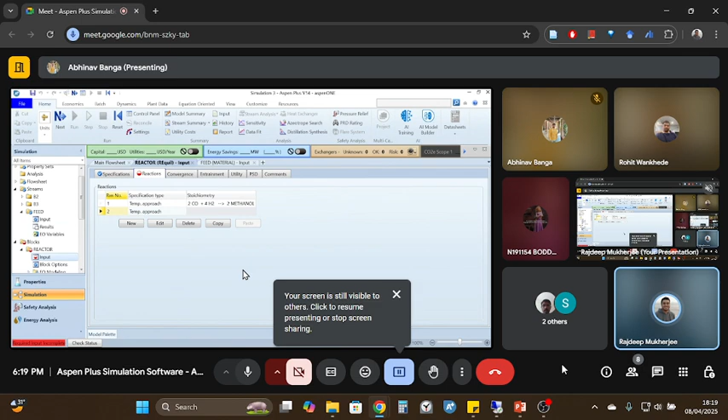Okay sir. So how are you guys solving it? Can you share your screen and show? Rohit or Abhinav, anyone can share your screen and show. 2 seconds. So this is you are defining the reaction, right? Okay. Yes, yes, you're going right. Yes, fine. Third reaction will also be good. Have you taken the screenshot of the problem that I've shared? Yes sir, I've taken the screenshot. Then it's not a problem. Yes, go ahead. Because I'm typing from here, otherwise it's very difficult if you change the screen, sir. Yes, yes. Sir, I have got results. Okay. Okay, then you share your screen and show us how you've done it. Okay, sir.

So did you optimize it yet or have you just simulated? Just simulated. Okay, okay. Show the simulation, the feed specification, and then the reactor specification. This is the reactor specification. 260, 50 bar. Okay. These are the reactions. Okay. Fine. Now start with the sensitivity analysis.

So what is the important compound in this reaction? CO2 and hydrogen. I think it is DME, no? The dimethyl ether. Yes. We have 50% of CO and then 50% of hydrogen. I think this is methane steam reforming. What reaction is this? You have to find out what is the important product that you are getting.

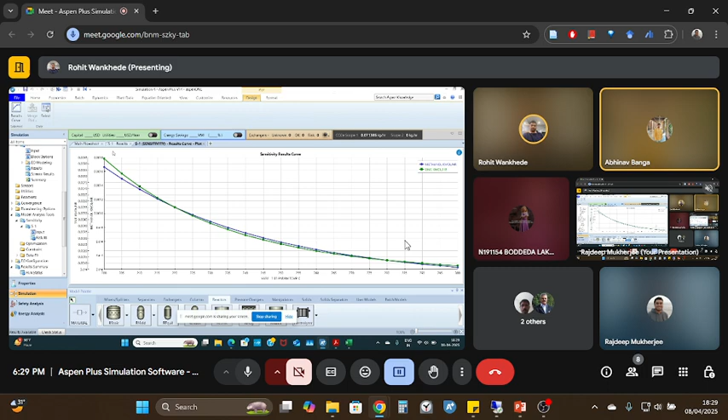As we decrease the temperature, sorry. As we decrease the temperature, the mole fraction is higher if it is below 260 degrees Celsius, right? Yes, sir. You can say that means it's an exothermic reaction. Yes, you can say that also. So now optimize this.

Variable would be temperature, right? Again. Yes. No, here you have to define the objective. This is going to be your difference. So select one product that you want to increase. Let's say DME.

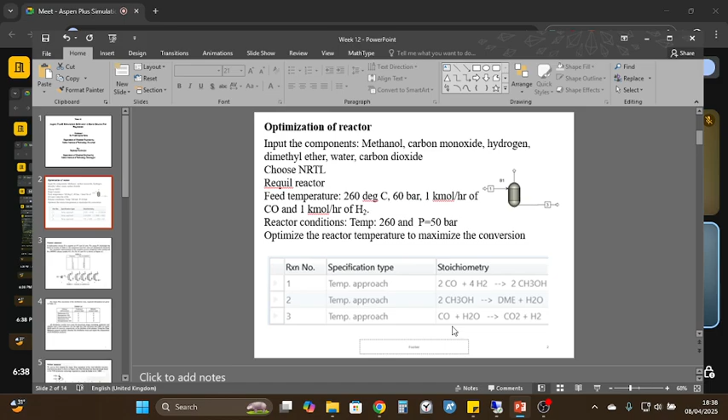So let us do the next problem. These are the types of problems that you are getting in your assignments. Over here, the questions are a bit long with a lot of data. So try to take a screenshot of this problem. It is not that difficult. They are very straightforward questions. It's just that the process flow sheets are a bit complicated.

A hydrocarbon stream H is supplied at 5 degrees Celsius and 2.5 atmosphere. The pump P1 discharges the feed at 10 atmosphere. In table 4.1, the component-wise flow rates are tabulated for stream H. The schematic representation of the complete process integrated with a pump and 5 distillation columns, that is C1, C2, C3, C4 and C5, are shown.

For Aspen Plus simulation of the distillation train, the required information is given. The names of the columns are given, C1, C2, C3, C4 and C5. The condenser pressure and the reboiler pressure are given. All distillation models have 20 theoretical stages, including condenser and reboiler, and a total condenser. For the light key and heavy key, we expect 99.9% and 0.1% recovery respectively in the distillate of all columns.

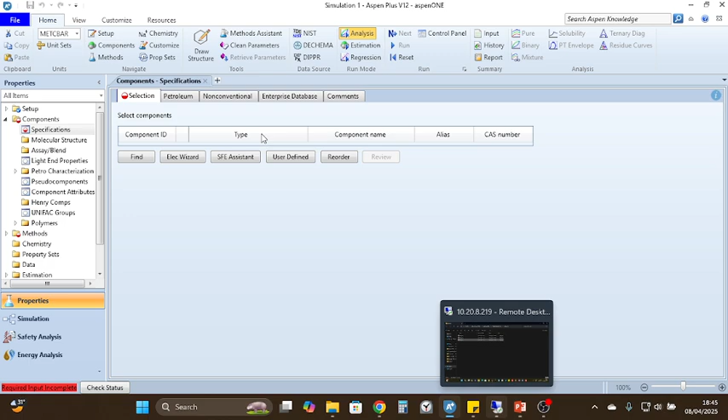C1, C2, C3, IC4, NC4, IC5, NC5, NC6. Then Peng-Robinson property method. The interaction parameters data. So property analysis.

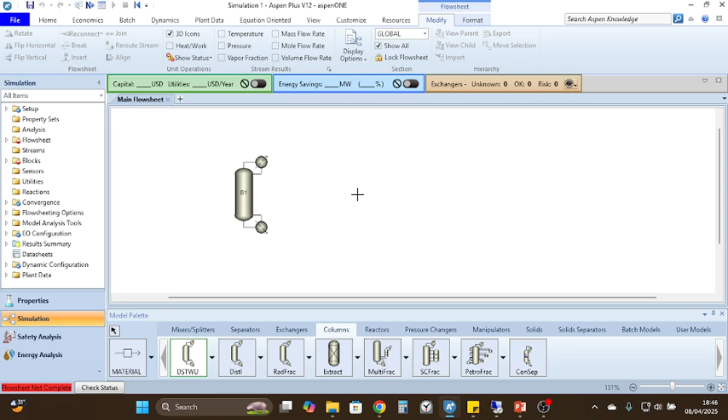So we have 5 distillation columns. 1, 2, 3, 4, and 5. So this is C1, C2, C3, C4, C5. So we have the feed. As discussed, I'm removing the pump from here. So we have the products.

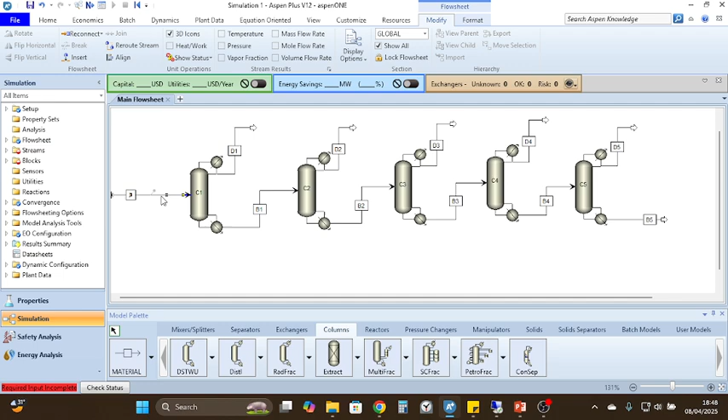This is your feed. This is D1. Specification: 5 degrees Celsius, 10 atmospheric pressure. Next is our mole flow. So C1 is 10, C2 is 35, C3 is 50, IC4 is 130.

NC4 is 200, IC5 is 180, NC5 is 200. I forgot to add another component. The component is C6.

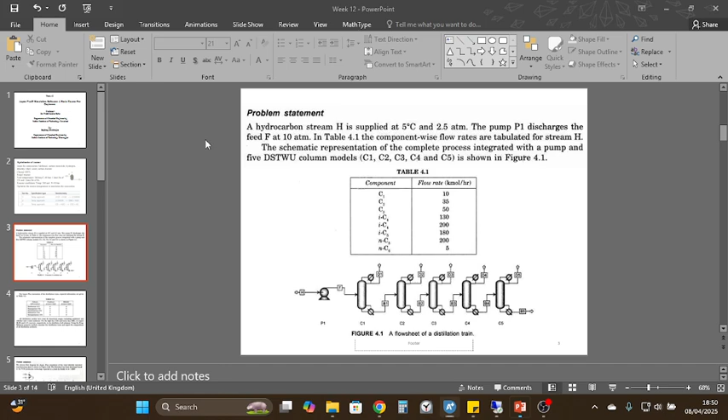C6 is 5. Now for C1, what will be the light key component? C1. And all the theoretical stages are 20. Condenser pressure is 9 and 9 atmosphere. So this is C1, and this is 0.999. Okay. Heavy key? C2, sir. Okay. 0.001.

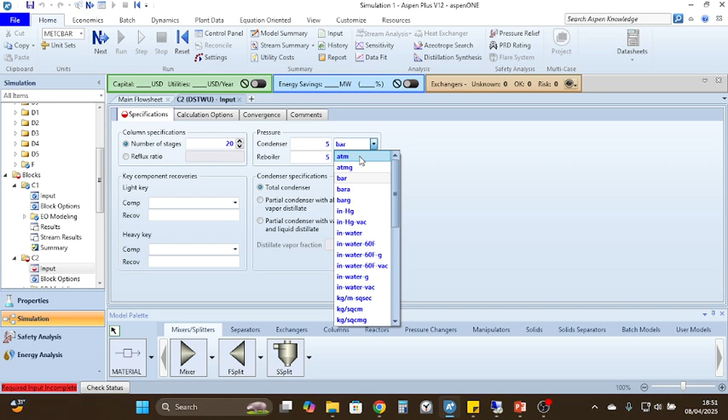Number of stages here also 20. This is 5 and 5 atmosphere. Here, what will be the component? C2. Yes, sir, C2, and light key is C2. Heavy key is C3.

This is our C3. 20. So our light component is C3. Heavy component is, what should be a heavy component? IC4 or NC4? IC4 will be the heavy component, sir. This is 4.

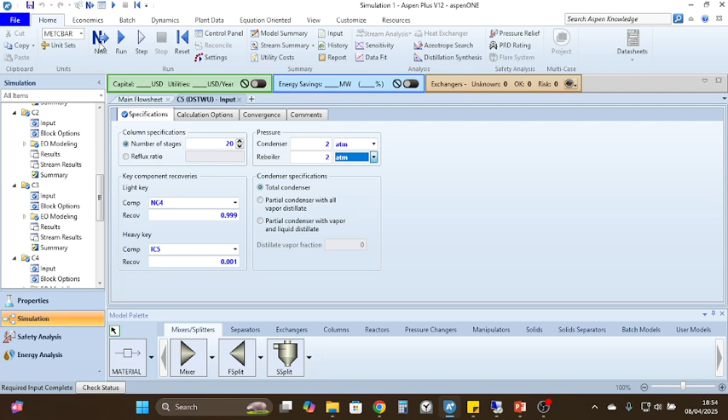So what component will be here? NC4. And the heavy key component will be IC5. So we should add some 2 more columns. Okay. So we look at all the results from here.

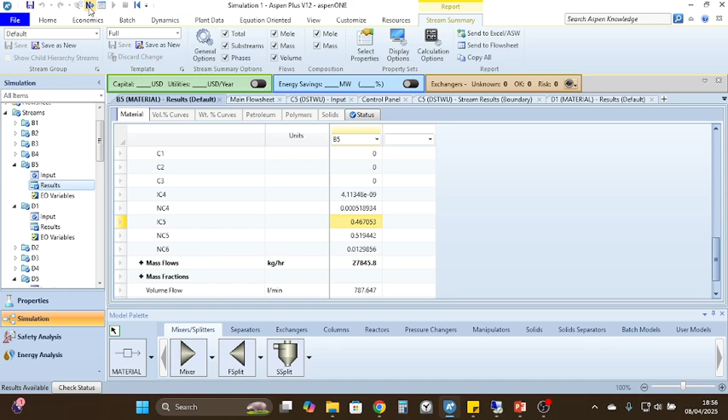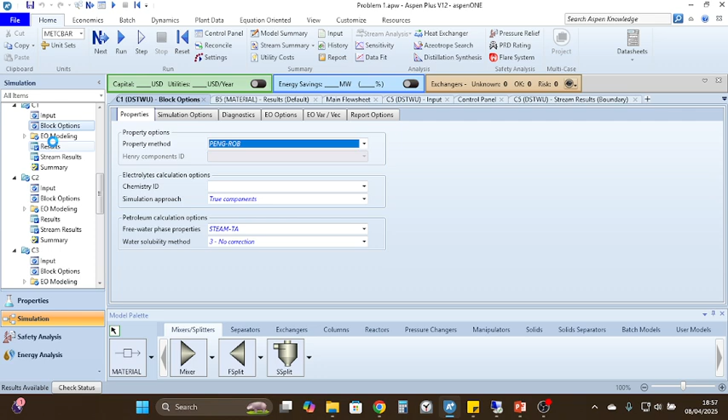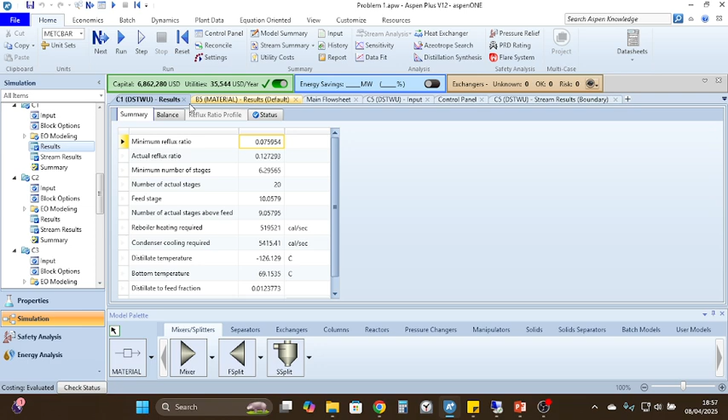There is another way you can do it. If you turn this on now, it will give you the cost of the unit operation that you are handling. So over here you can see it is showing that it is driven by electricity, but you can change this also. Usually it is given over here if you want to add any utility stream or not, but since it is a shortcut distillation method, that option is not being shown.

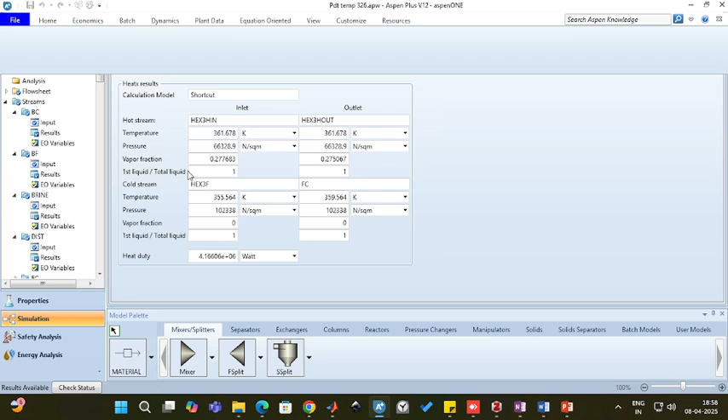So this is actually a downstream process that I have designed for my current problem over here. So, for example, this is a condenser over here. So I need to find out the utility that is required. So over here I have defined the utility. I have defined the electricity and I have defined the water as the cooling utility that will be required. So for this condenser, once I've specified over here, there is a utility option. So I have to select this utility ID as water.

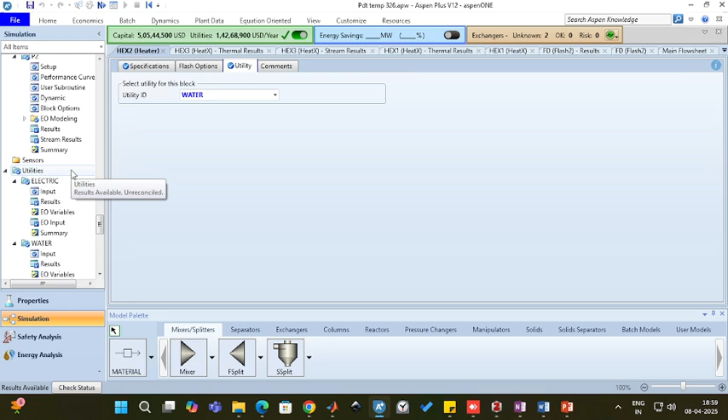So naturally that calculation will happen as to how much water is being required. In this economic analyzer, it is going to estimate the total amount of water which will be required in my process. And to define the utility, it is defined usually over here. So you can give the purchase price of water.

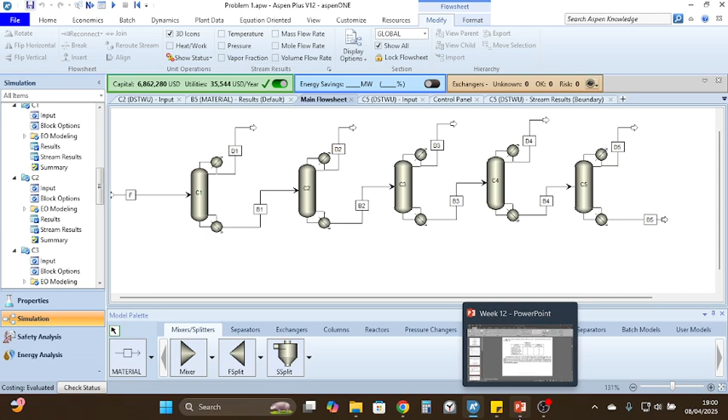Let us go to the next problem. This one is a very big problem, so I'm going to give you 15 minutes time to solve it. And I'm not going to solve this problem. This is not much difficult. There is this compressor, flash, and a stripper. Do you want me to solve the short problems or the long one?

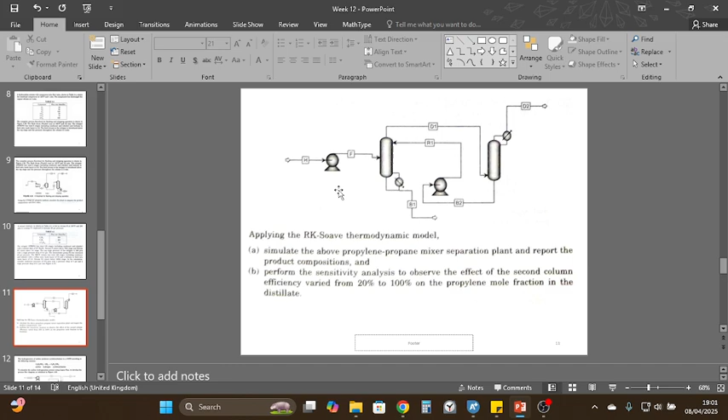Yeah, you solve the difficult problem. If it is short, it's easy, we can do it ourselves. Okay, then I'm going to solve this problem. This problem also I can solve. So two problems will be there which you can practice on your own.

So over here we have the process flow diagram of vinyl chloride monomer manufacturing plant, based on the VCM production technology reported in Seider. So we have a mixer going into a reactor, then another mixer, a heater, a pump, again a heater, then again a reactor, then two heat exchangers, then two distillation columns, and finally a splitter from where a stream is going to purge and the remaining stream is going back and mixing with the outlet of this reactor. So take a screenshot of this process flow diagram first.

So this is the question statement. Take a screenshot of this as well. Pure ethylene stored as a gas at 70 degree Fahrenheit and 1000 psia with a flow rate of 20 tons per hour, and pure chlorine stored as a liquid at 70 degree Fahrenheit and 150 psia with a flow rate of 50 tons per hour enter the mixer block B1 operated at 2 atmosphere.

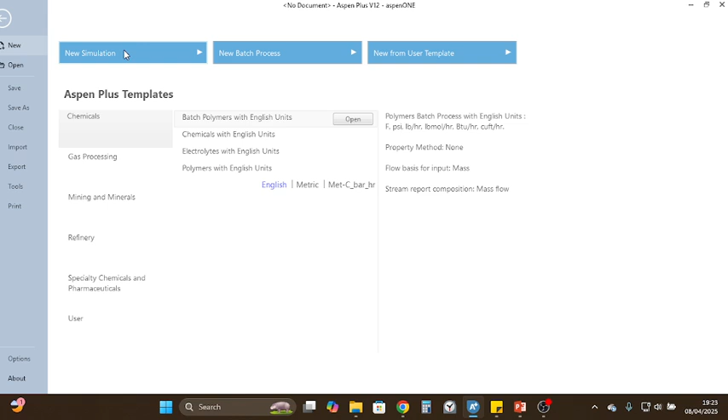Hello, sir. Yes. Sir, if time permits, after that, can you solve assignment 2 part B question? Assignment 2 part B. In that, I have used Peng-Robinson method, but I am not getting the right answer. A different method also I have used. The answers are not matching with the given answer. I think we have discussed this problem, right? You had asked me the same thing about Peng-Robinson method. Did they specify the method name specifically? No, method is not given actually. This is assignment 2. Okay.

So if the method name is not given, then through method assistant, whatever you have chosen, it should be correct. You can mail NPTEL regarding this. That is the group mail that you have. Someone else had asked the same problem. It was the same assignment, sir. I think week 2 assignment only. You two had the same problem. Same assignment week 2. Yes, yes.

Over there also there was some problem: the method name was not specified, so he has done it with method assistant, and then the answer did not match. It will be close, but it won't be within the range that is given in the answer. Is this the same problem that you have faced? Yes, sir. But it is close, right? Not that much closer. Answers are different. If time permits, can you just check after this? Okay.

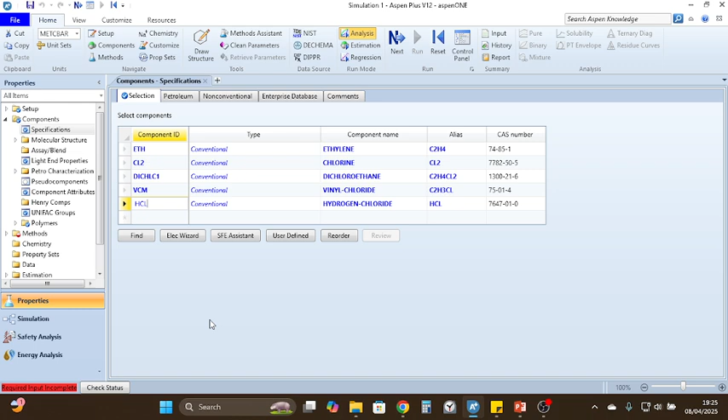So has anyone been able to solve this problem entirely or partially? Just now the block diagram has been made. Okay, take time.

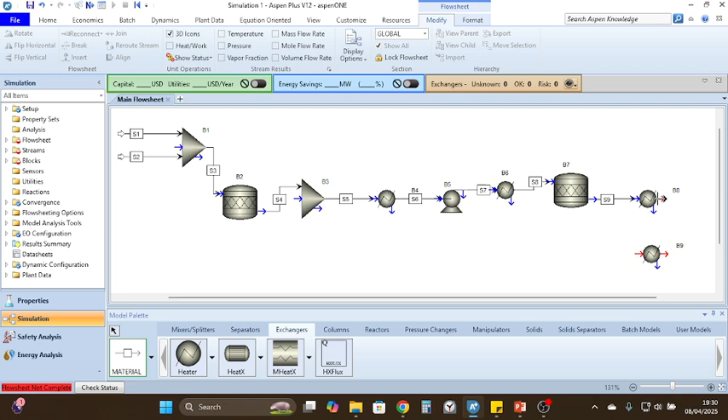What are these columns? These are DSTWU columns. Yes, sir.

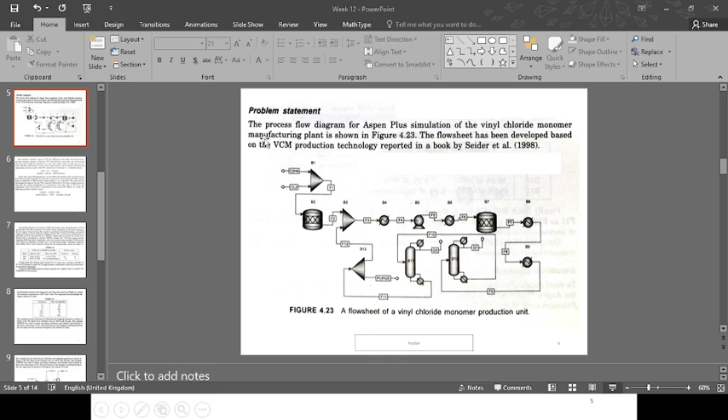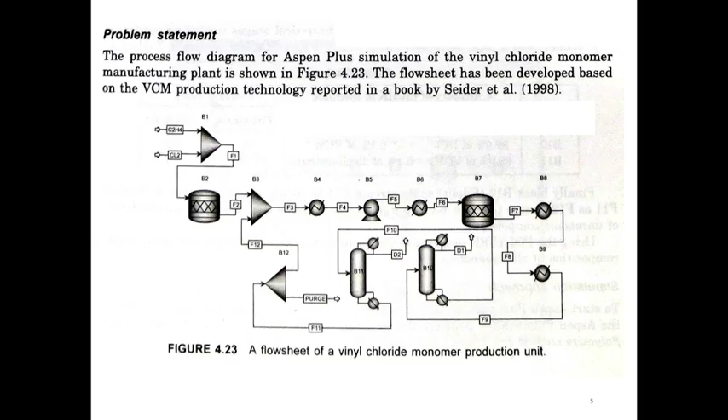With a flow rate of 20 tons per hour. So this is a mass. So we have 20. This is tons per hour. 20 tons per hour.

Next we have chlorine. What is the condition of chlorine? 70 degree Fahrenheit, 150 psi pressure. So 70 Fahrenheit, 150 psi pressure, and the mass flow is 50 tons per hour. So mass flow, this is 50.

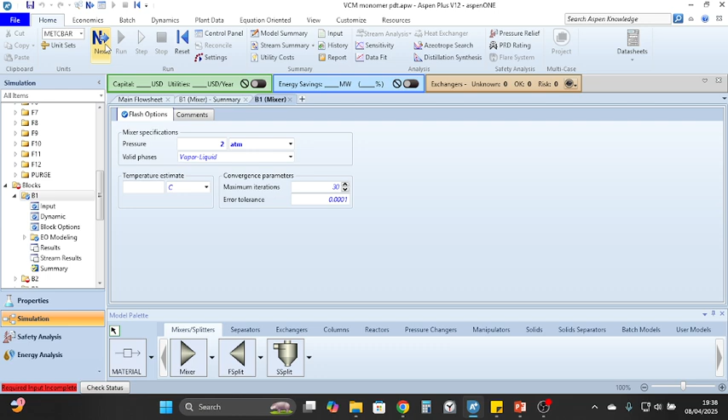Now this is our B1, which then moves to reactor B2, which is run at 363 Kelvin and 1.5 atmosphere pressure. 363 Kelvin, 1.5 atmosphere pressure.

In this stoichiometric reaction, the following chlorination reaction occurs with 98% conversion of ethylene. So this is gas, this is liquid. So the valid phases is going to be vapor liquid.

Next we have to define the reaction. So enter the stoichiometric reaction with ethylene and we have chlorine, and the product is dichloroethane. The fractional conversion is 98%.

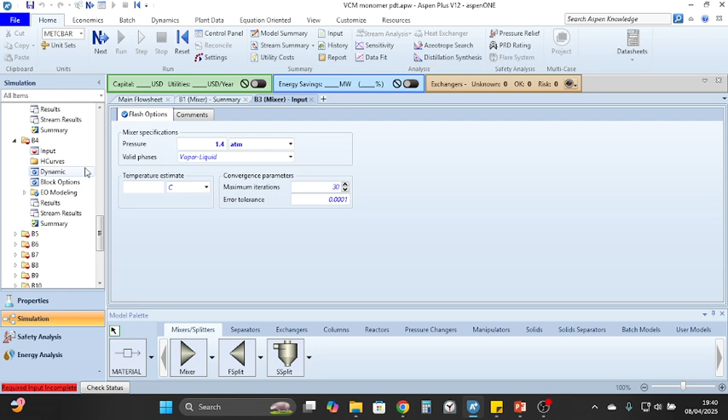So this is 298 Kelvin, and since it is fully condensed we have to give the vapor fraction as 0. So B4 is complete. Now coming to B5. The pump B5 has discharged the liquid at 26 atmosphere pressure. So discharge pressure 26 atmosphere.

The evaporator, now coming to B6. B6 is our evaporator. The evaporator B6 performs a phase change operation and then the vapor temperature is increased in the same unit to 515 Kelvin. So phase change is happening and then the temperature is increased to 515 Kelvin. So here we are going to specify the vapor fraction. The temperature is 515 Kelvin, and here the vapor fraction is going to be 1, that is, entire feed is converted into vapor since phase change has happened.

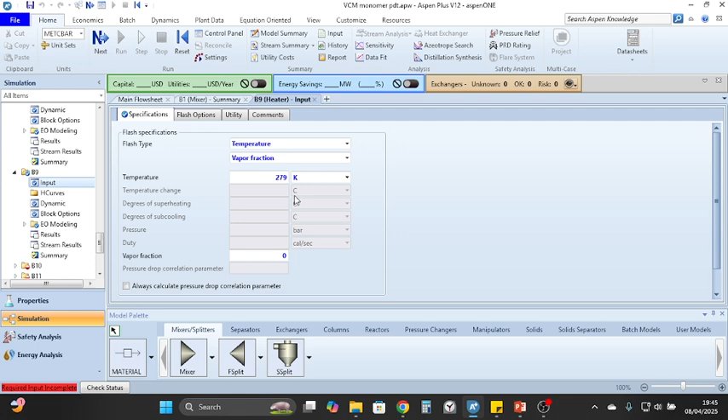So first we are going to come to B10. The number of stages is 10 theoretical stages. The condenser pressure is 20 atmosphere. The reboiler pressure is 22 atmosphere. The light key component given is HCl and the heavy key component is VCM. Recovery is 99.9%, so 0.999, and this is 0.001, and a total condenser is given.

Next we are going to come to B11. In B11, the number of stages is 10, and the light key component is VCM at 0.999, and the heavy key component is dichloroethane. This recovery is 0.001. The condenser pressure is 7.5 atmosphere and the reboiler pressure is 8 atmosphere.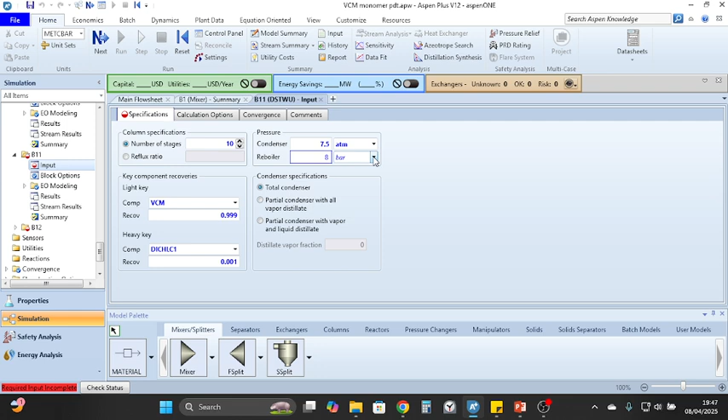Last is our B12. This is a splitter. B12 splits the stream F11 to ensure the recycling of 99.99% of F11 as the F12 stream to mixer B3.

point. So all the required inputs are complete now. So

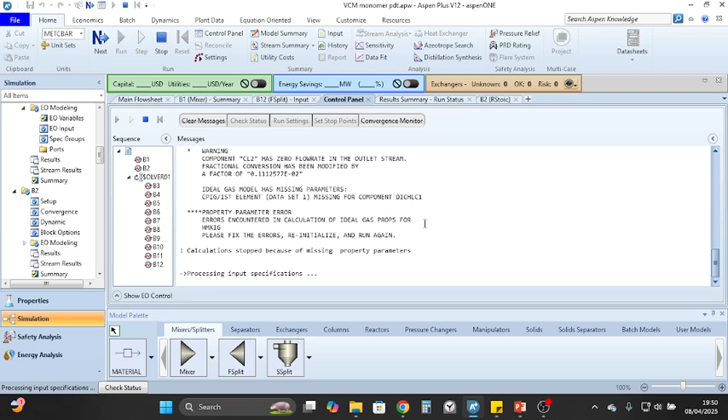CL2 has zero flow in the output stream.

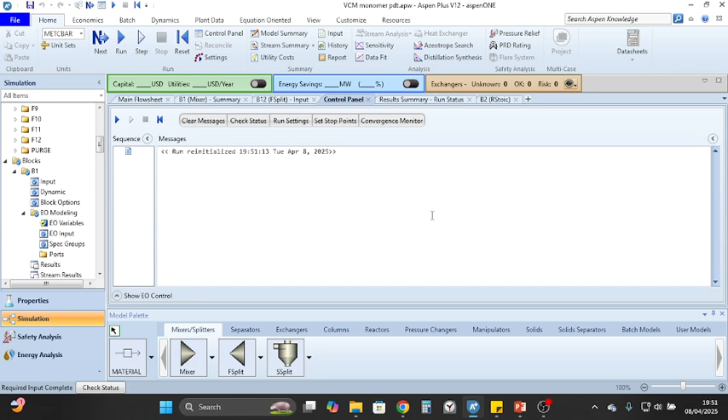What is the problem? Rohit, have you been able to simulate the problem? Have you solved it? Yes sir. Did you get the answer? Yes sir. Okay, so in my simulation it is showing me one error. I'm not able to understand where the error is. It's telling me the control panel is showing zero flow rate in the output stream.

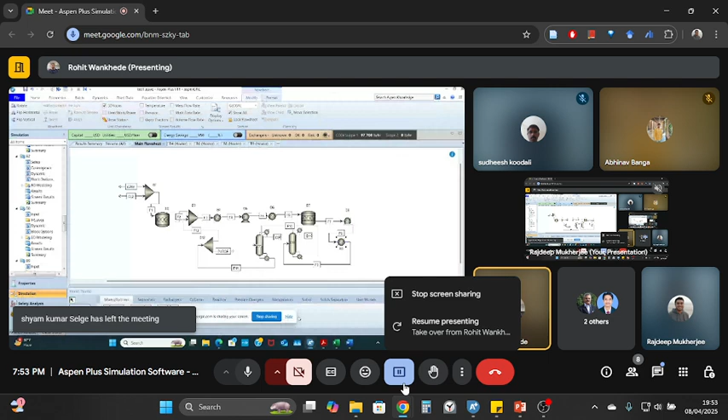Show me the VCM mole fraction in this. In T1 it is 0.9786, and in T2 VCM is 0.9896. Yes, it's correct. This is correct.

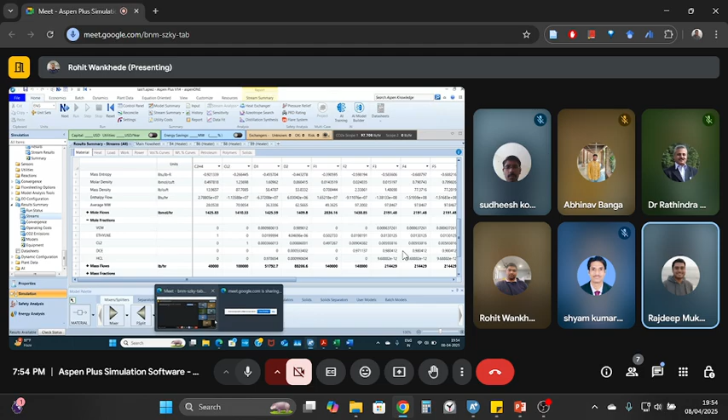Okay, so you can see this problem and try to solve it on your own. There is some error that I have probably made in inputting the values here. Try to redo this in your free time. There is nothing complicated in this problem, all the data are available, you just need to put the values properly and it will be done.

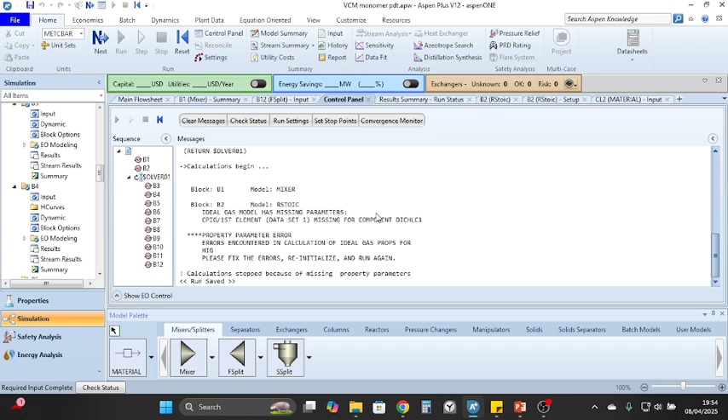What I want to show you is I want to demonstrate one dynamic problem before we end the class. There are multiple problems of this type that I've given here. I thought of solving this problem as well, but we don't have that much time, so we are going to simulate the dynamics of a flash drum. Please share your screen.

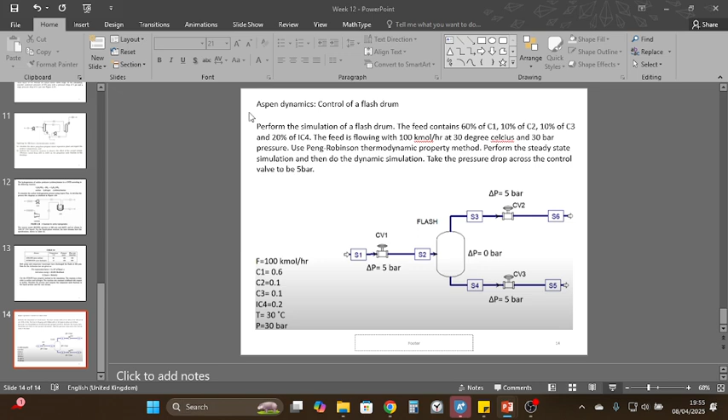So this is the problem we are going to solve: the dynamics of a flash drum. We will perform a simulation of a flash drum. The feed contains 60% C1, 10% C2, 10% C3, and 20% IC4. The feed is flowing at 100 kmol per hour at 30 degrees Celsius and 30 bar pressure. We are going to use the Peng-Robinson thermodynamic property method. First we perform the steady state simulation, then the dynamic simulation. We take the pressure drop across the control valve to be 5 bar, as given in the figure.

So let us specify the components first. We have C1, then C2, C3, and IC4. And we are going to use the Peng-Robinson method.

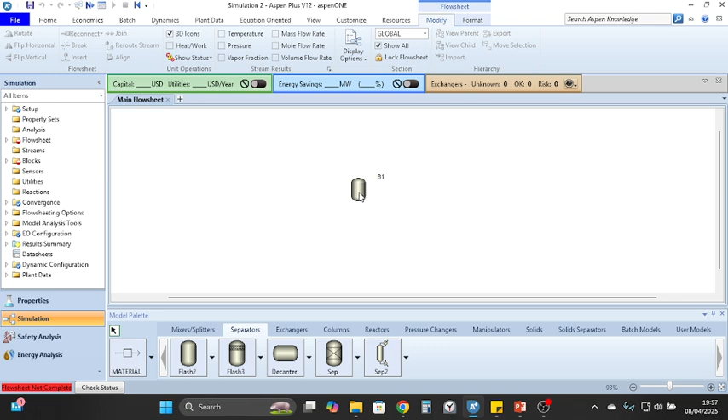So we have 3 control valves and a flash drum. Over here we are going to take the separator flash 2, then pressure changers, so we have one valve here, one valve here, one valve here. This is the side of the valves. This is the fluid that is flowing.

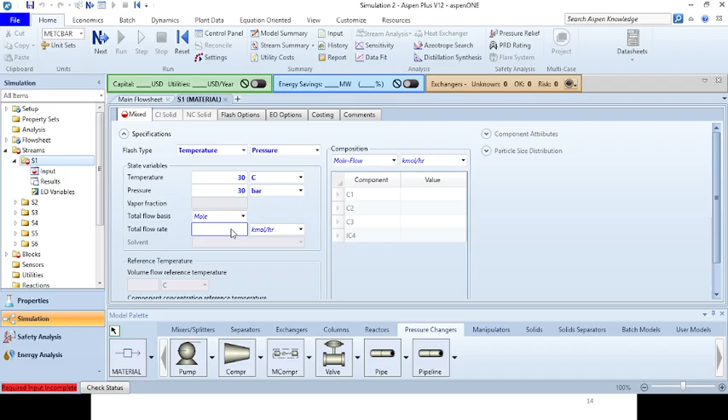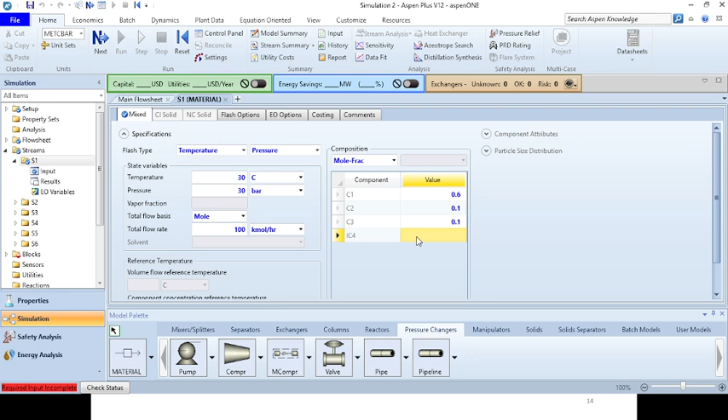Now we have to specify the feed. For doing a dynamic simulation it is very similar to the steady state simulation, everything remains the same. So we have 30 degrees Celsius and 30 bar pressure, and the mole flow is 100 kilomole per hour. Next we have mole fraction: C1 is 60%, C2 is 10%, C3 is also 10%, and IC4 is 20%. This is equal to 1.

Next, we have to specify the temperature and pressure of the flash drum.

So let us perform adiabatic flashing. Pressure drop, let it be 0 bar. Yes, over here it is said that delta P is 0 bar. There is pressure, and then doing adiabatic flashing, that is, there is no heat exchange taking place.

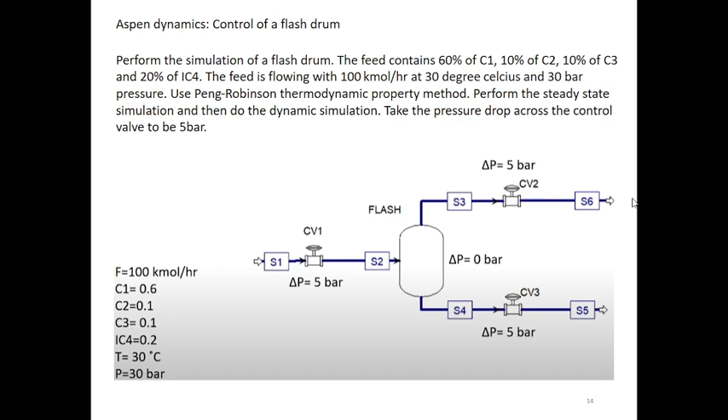5 bar, this is 4. Sir, you wrote 0 bar pressure for the flash drum. No, it is okay. This delta P equals 0, that pressure, if I specify, that is also pressure drop calculation. Okay.

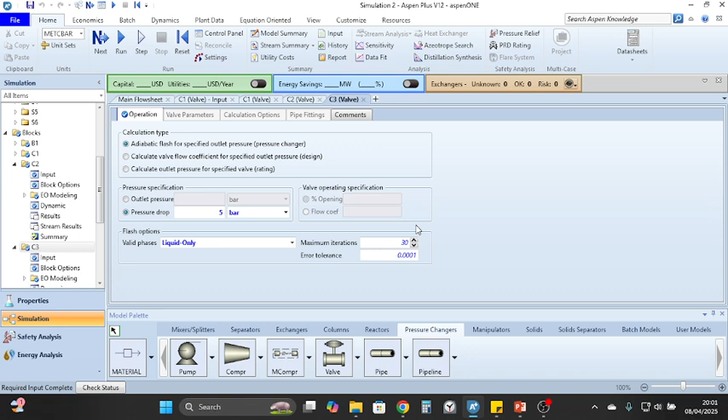So this is 5 bar. This is C2, this is C3. So C2 is our vapor, so here this will be vapor only. Pressure drop is 5 bar. This is our liquid only. This is also. Does it create any changes if you don't change liquid or vapor? No, but it is good practice. Okay.

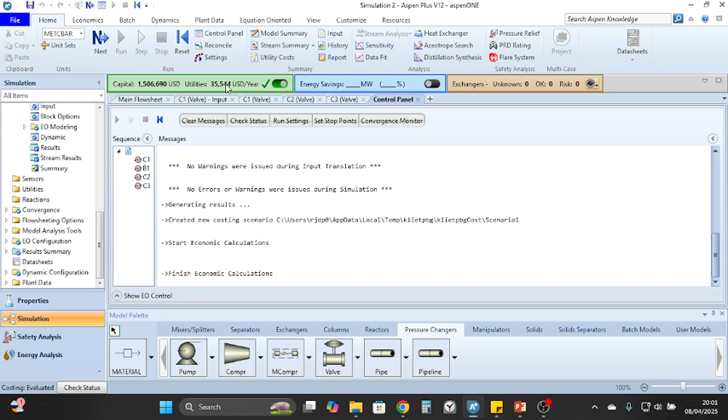So we have got our results. Okay, now if we turn on this economic analyzer, from here we can get the dimension of the flash drum. If we come to here, you can see that the liquid volume, the vessel diameter, and the vessel height, we are going to get from this economic analyzer. Okay.

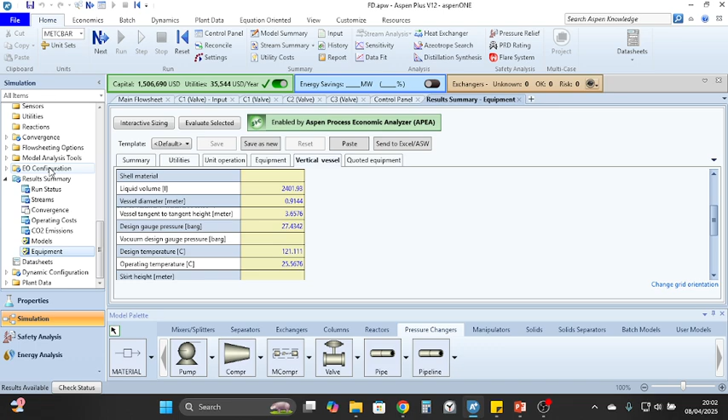Now what we are going to do is come to our flash drum, that is this B1. We are going to come to dynamics, and we are going to select the dynamic mode. Once we select the dynamic mode, we are going to come here in dynamic. Okay, so here it is setting instantaneous.

We are going to consider a vertical cylinder. So in vertical cylinder, the length and diameter of the vessel can be given through here. So we can change it also. Yes, you can give your own values also, but I am going to give the value that I found out from here. Okay.

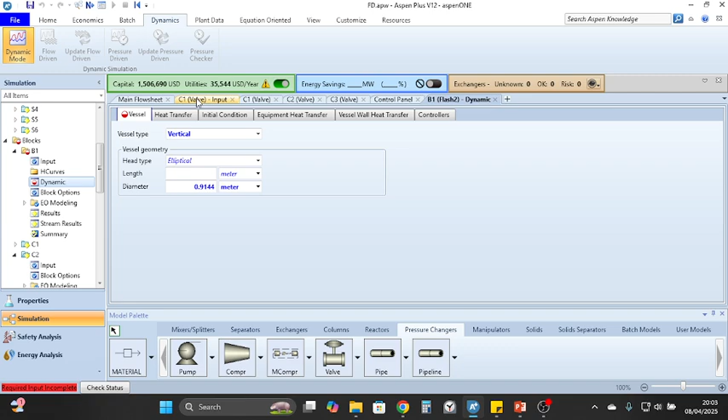So here you come to the dynamic part. Paste. So this was a diameter, right? Diameter is 0.9 and the length is 3.6576.

So now we select next, and we click on OK. Now that is being done.

Now we are going to select this pressure checker. It is said that the flow sheet is configured to be fully pressure driven. Now what we are going to do is select this pressure driven.

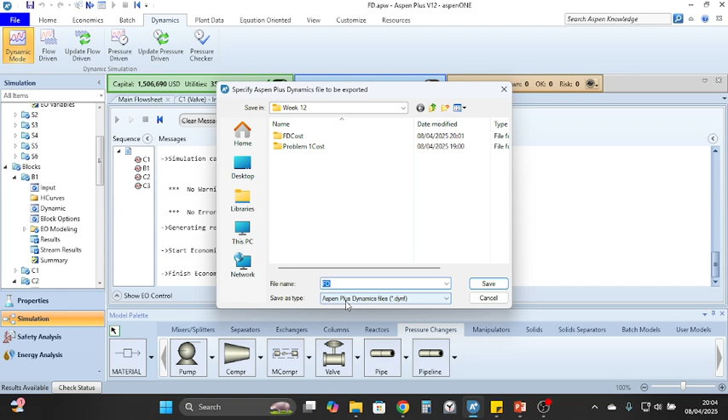Now it is going to ask for a directory where you want to save it, and it will be saved as a different file, Aspen Plus dynamic files. So you click on save. Once you click on save, your Aspen Plus dynamics file will open. It's taking some time.

What does pressure driven mean? It means that your entire simulation is correct and you can now develop the dynamics of the simulation. It is just a checker to see whether your entire simulation is correct or not.

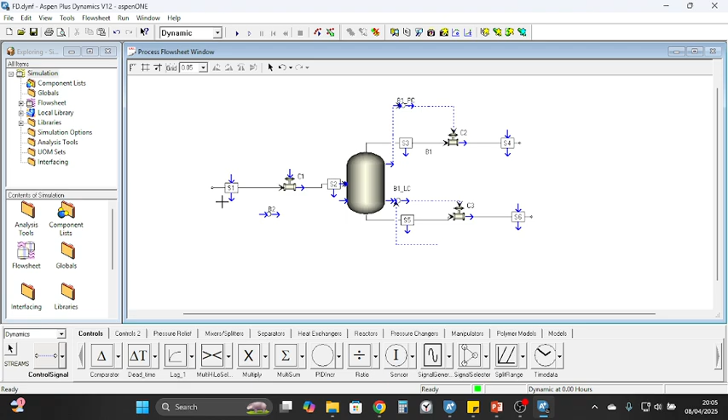So here we have one pressure, we have one level controller, and here is one pressure controller. We are going to add one more controller. So over here, instead of previously we had only material stream, now we are going to do control signals. So what we are going to control is the mole flow of the feed. So this is coming over here. This is our process variable, and this is our operating variable, which is going to come to this C1. Okay.

Now we have to specify the action. We have to specify it as reverse, but before that, make sure that you change it to initialization, this status over here. Now you come over here, you come to this configure and you are going to do reverse, and you select this initialize variable. So naturally we had given 100 kilomole per hour as our simulation, steady state simulation, so that value gets updated over here. Okay.

Now what we are going to do is we are going to start the simulation at this point.

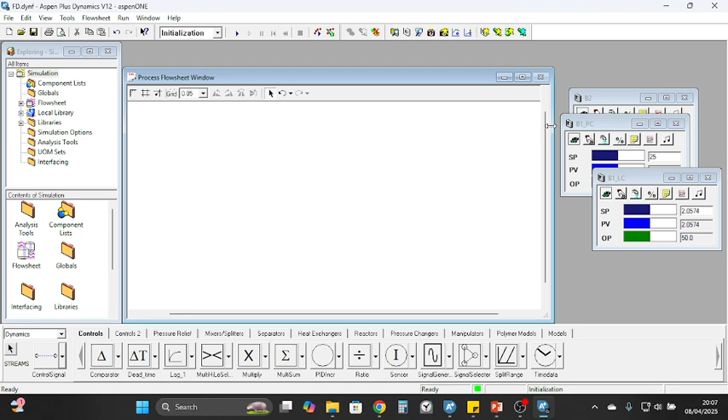So remember, this PC is our pressure controller. Okay, this is the level controller, and these values that you are seeing over here, they are all being tabulated from the steady state simulation. Now before doing it, we are going to go to Run, Options. We are going to convert this mode to dynamic, and we are going to reduce the time so that we can see the changes properly. Okay.

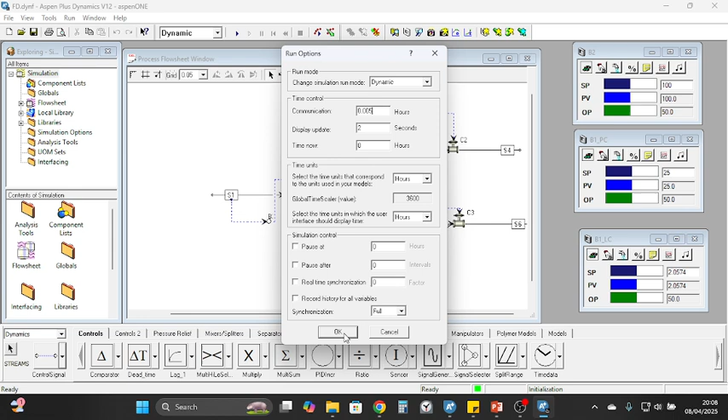Now this is in dynamic mode. This is the results plot for the flow controller, that is B2, this one. And we will see the variation of, let's say, the level over here. Now I'm starting the simulation. So this has started. Initially we have not given any change to the flows over here, so it is a steady state.

A straight line is coming for the process variable, that is this line over here. You can see 100 over here, and a straight line is coming. You can see the process variable of the level, it is straight, it is not changing. But since we have started this process just now, we need to wait for the controller output of this controller C3 till it reaches the steady state. Now you can see that it has reached a steady state over here. Okay. So over here this was 100.

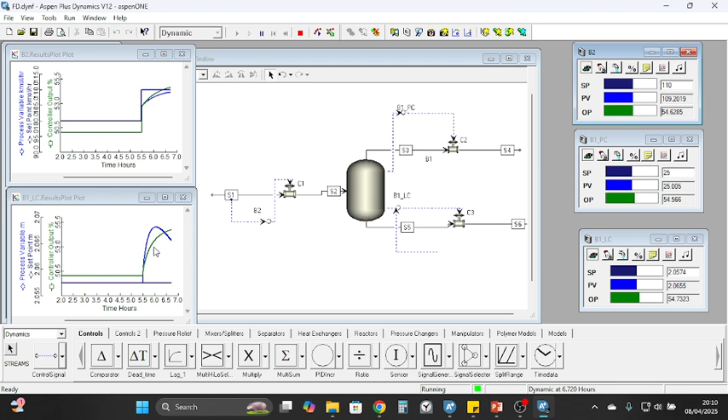Now what we are going to do is we are going to increase it by 10%. Now I have increased it. You can see that these changes are reflected in both the streams. Here you can see that this process variable, the height, has first increased. The controller output has also increased. Now as the controller output is coming to a steady state, the height is again being controlled back to its initial state.

But one thing you have to notice over here, as we have given 110, the process variable needs to reach the set point, right? But it is taking a bit too much time. So the response is a bit slow. For that, we have to tune this controller. So let us wait till it reaches a steady state, both the level of this flash drum and this flow rate over here.

Sir, can we give the line size also, upstream of control and downstream of control? Sorry? Normally the upstream and downstream control line sizes are different. For example, upstream is 10 inch and downstream is 8 inch. Can I give like that also? I don't think that you can, but you can try once. In the valve you are saying, right? Yes, sir. You can check it. I'm not sure about that. I haven't come across whether we can give this specification or not.

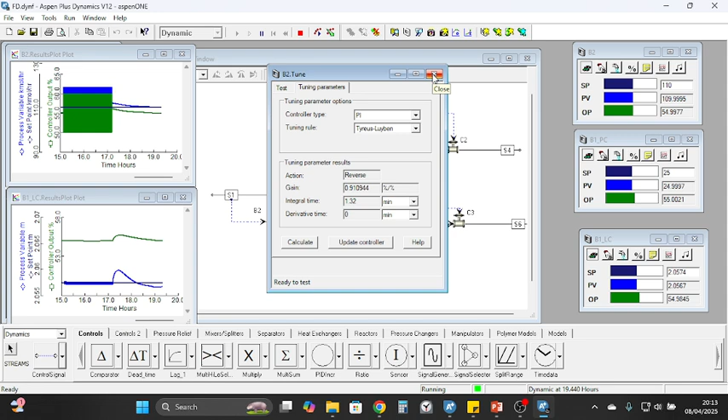So you get the ultimate gain and the ultimate time period over here. Now we are going to come to the tuning parameters and select Calculate. You see the gain, the integral time and the derivative time have all been calculated. Now we are going to update the controller. Once we have updated the controller, the response will be fast now. Now I'm closing it. Previously when I had given a 10% step change, it took a lot of time for the process variable to reach.

Okay. Now I'm going to change this, reduce this by 10%, and we are going to see that the response of this process variable is much faster. Now you can see that after tuning, this has become much faster.

So this was an example of a flash drum using a level controller and a pressure controller. If you want to see the plot for pressure, that is the pressure controller, this is the valve, and this is the graph for it.